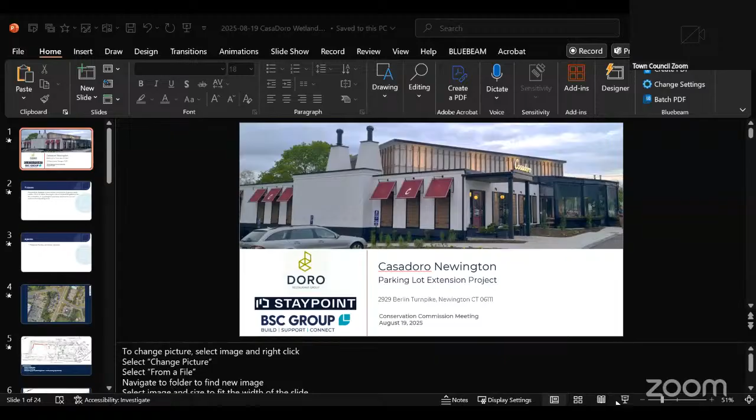I believe there were some modifications to the application, and we do have some comments from the town engineer regarding the current site proposal. I would like to read those comments that we received from the town engineer into the record. I don't know if all the commissioners have had a chance to read this, so I want to read it into the application so that we have a good record. This is an application summary from town engineer Chris Zibido.

It says, please note the applicant has submitted revised plans on Wednesday, 8/13/25. So this memo is based on a quick review of these new plans and previously submitted plans. Most notable is the removal of the pedestrian stairs in the adjacent commercial plaza. Applicant is seeking to construct an expansion of an existing parking area for the Casadoro Restaurant, the former Bertucci's Restaurant on the west side of the Berlin Turnpike.

To achieve the maximum number of parking spaces for the site, this application includes a substantial retaining wall along the west and southern sides of the property. This proposal also includes a novel stormwater treatment and detention system utilizing the landscape islands as a bioswale, then containing the higher level runoff in a subsurface drainage detention pond before excess runoff exits the system on the south.

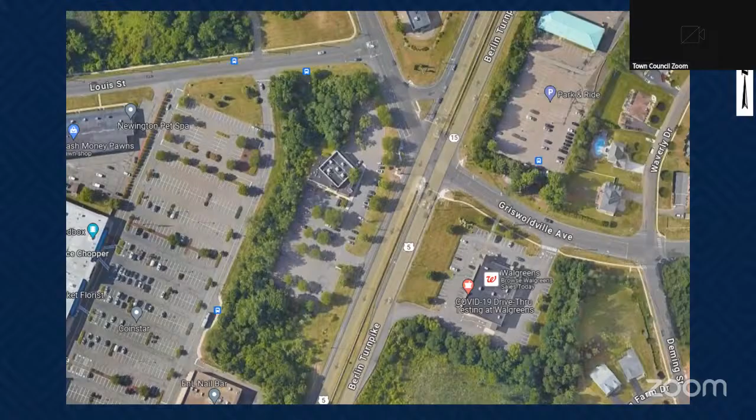That's essentially all I'm going to be doing this evening. I'll try to keep this as straightforward as possible. We're referring to 2929 Berlin Turnpike, the former Bertucci's property, and this is the survey associated with that.

I'll note, for the record, that during this interim phase, a silt fence and erosion berm have been installed, essentially to prevent any additional disturbance during this time, as we've been negotiating with both the Wetland Commission and the Planning and Zoning Commission.

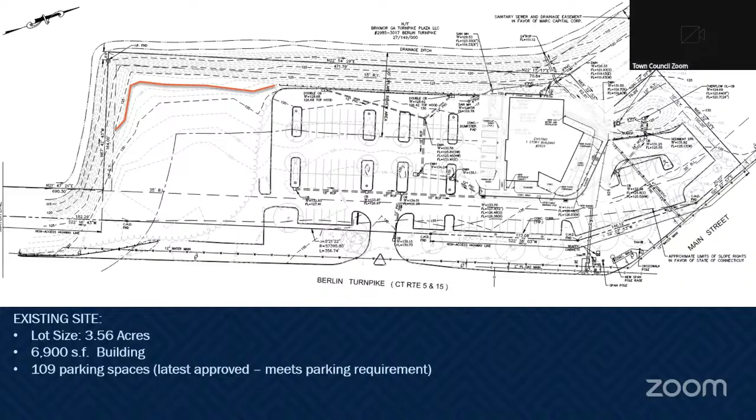There's an update to our erosion sedimentation control plan. The main point I'd like to identify is there's a substantial amount of additional shading on the plan. This shading represents any slopes in excess of 15%, which is a requirement for the Newington regulations. We've added that to all the plans in the development. Any disturbance within that area, obviously, we'll coordinate with town staff.

There's a question as to whether this would need to trigger a public hearing for a potential special permit, but I've presented this to Planning and Zoning. I presented this particular issue regarding the 15% slopes at the previous meeting, and at this point we are still in the process of site plan approval.

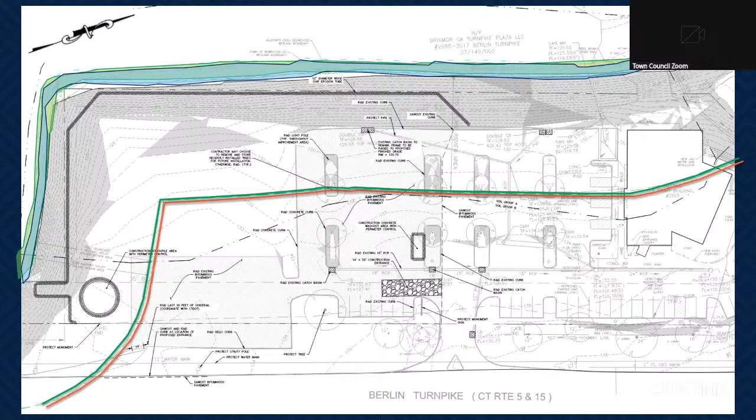We've added, again just for clarification purposes, the green identified in the background is the delineated wetland on site. The blue in front of that is the town GIS identified wetland. The green and red lines represent the infield delineated and town upland review boundary areas.

As far as erosion sedimentation control, we've added a note on the plan - this green area is our construction washout, the concrete washout area.

As far as perimeter controls, I understand Mr. Zebedeo's concern with regard to erosion controls, especially in relation to the wall. One of the main reasons we're proposing the use of the 12-inch wood chip berm is its substantial increased stability and substantial increase in filtration and benefit with regard to protecting downstream areas. It's got substantially more mass and filtration possibility, which is why we're proposing this use, as opposed to simply just an erosion and silt fence. The turbidity curtain obviously is something we can definitely include in the stream area.

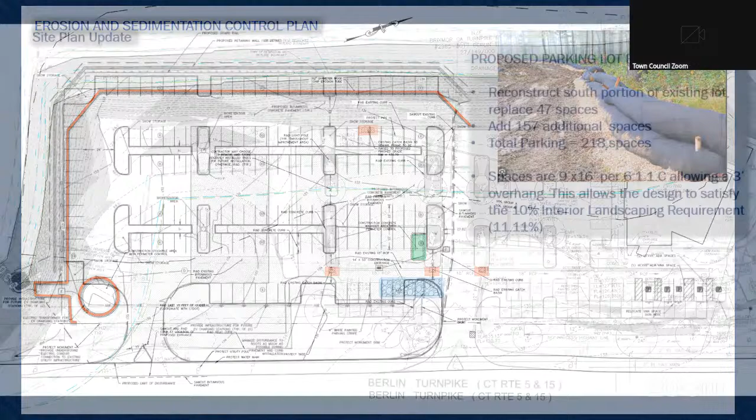As far as the site plan update, there are a few minor changes. If I could correct the record, the site plan narrative had not been submitted, had not been updated. The correct number of parking spaces currently being proposed is 218. We are replacing 47 existing spaces, and we are adding in total 157 additional spaces as identified here.

There was a minor change based on the layout associated with nonconformities regarding the permanent monument sign that is currently nonconforming on the property. We had to adjust the curb lines so we did not modify the sign. As a result, we removed the landscape island in the center here. This switched to 18-foot spaces in place of the 16-foot, and everything shifted up as a result. There may also be some additional concerns regarding additional pavement encroaching in this area. I have to examine that, and that will be part of the planning and zoning submission when it's submitted.

Another change was I had designed my initial handicap parking associated with the International Building Code. I did not recall at the time that the state of Connecticut has a more stringent requirement for that, so we went from the 7 initially proposed up to 9 proposed to satisfy the state of Connecticut Building Code.

Is that vertical bar going across there? Is that a baffle for floating debris? This baffle right here. Yes. So basically what happens is this drops directly down into this opening, and then this grate sits directly on top of that. If I go back up to this, you could see. I'm saying, is the idea to hold floatables behind that?

Yeah, so the floatables like refuse, bottles and so on basically collect on the top here. And then anything finer will drop into the structure itself and is contained inside there, so any wrappers or contaminants or those types of things are basically right there at the surface. Thinking about the amount of litter we have lately around, that's going to require some pretty regular maintenance. Yep.

They've designed it, and as small as it is, actually it is quite wide in diameter, and they have designed all of their products, and that's why I specifically like working with this company. They've designed all their products to account for those types of things. They recognize that a landscape crew is most likely only going to come through here once or twice a year. So they've designed their systems so that as something gets clogged, it basically lifts up a bit more, and it's intended to hold a certain amount of sediment and contaminants through a longer period of

time. If it were to be fully clogged, the reason why there's a small step in the structure is it just overtops. Now, you can remove the structure entirely and it still functions effectively because it drains directly into the actual treatment system. So this is providing your pre-treatment. If it were to fully fail, for example, it just bypasses directly into the bioretention swale and that becomes your pre-treatment. So it's a number of lines of defense.

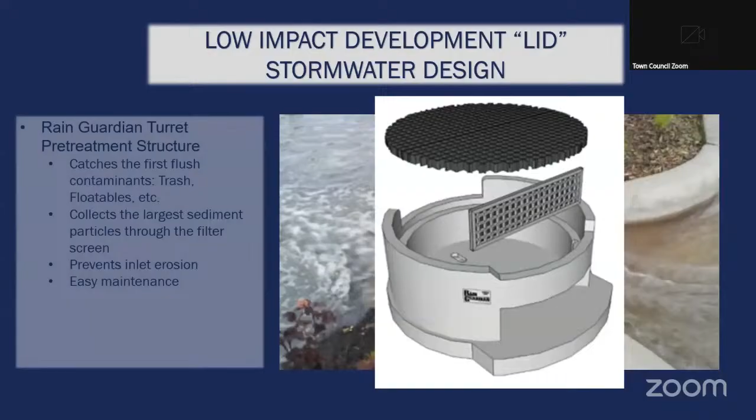And then this is what the actual swale looks like. Your pre-treatment structure will be up here. It discharges into the system itself. So you have 3 inches of mulch, standard mulch. There's nothing complicated about it. It gets replaced every year, and that actually provides up to 90% of the sediment loading removal, because as it filters through the mulch, all of the larger particles of sediment are collected. And then when the landscape crew comes through to do their mulch every year, they take out the mulch, they put in new, and you've just removed all of your contaminants.

Any contaminants that make their way through the mulch go into what's called high flow media. It is a proprietary media. It runs at about 100 inches per hour, but it's got a very small amount of organics in it. And the organics essentially chew on all of the contaminants that come off of the vehicles. It's basically a self-healing system. They use the nutrients provided from the contaminants and it continues to recycle itself. So for maintenance on the high flow media, they have case studies showing that it continues to provide greater than 80% TSS removal for 10 years or longer.

And then also all of the landscaping that is proposed is specifically designed to uptake any phosphorus, nitrogen, any of the typical types of contaminants that come off of vehicles. It filters down through the media into the bridging stone and then into this, it's essentially a milk crate structure, which is the detention. In this case, the detention will store and provide the peak flow attenuation so that we're not increasing the amount of flow off the site. So it all works as kind of a symbiotic system. And the benefit of this is you've eliminated all of your catch basins and pipes. So essentially everything sheet flows to this system and then is treated.

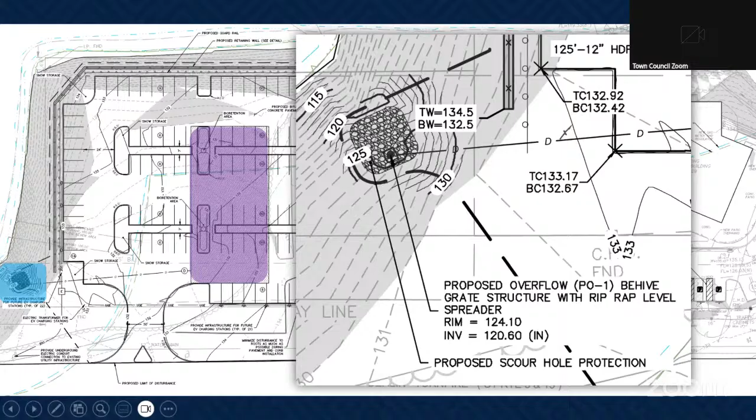Those are the changes that were made. I know that there were a number of comments that were brought up in the meeting. I don't remember all of them directly, but I can do my best to provide some backup or response to those. So in the engineer's report, he mentions that the employee walkway staircase has been removed. You want to speak about that a little bit? What was the reason for removing that?

So one of the reasons why we are requesting the higher number of spaces that we are, I did some analysis to determine that right now they are renting, I believe it's 50 spaces from the Price Chopper Plaza. They only have a 1-year lease on it, maybe even by month. So they could choose at any time to say, we're not going to renew your lease. So we calculated at most, at peak season with the restaurant running on a Saturday night with full reservations, they see upwards of 50 employees. So I verified that we can essentially place 50 employees.

If we were to imagine that each employee drives him or herself individually, there are still a greater number of spaces with 50 spaces accommodated for employees, in addition to those for the users of the restaurant. So as a result of that, and the fact that we were on an adjacent property and they could at any time choose to revoke the lease, the decision was made by the development team that the staircase was just not a viable pathway to move forward. Thank you.

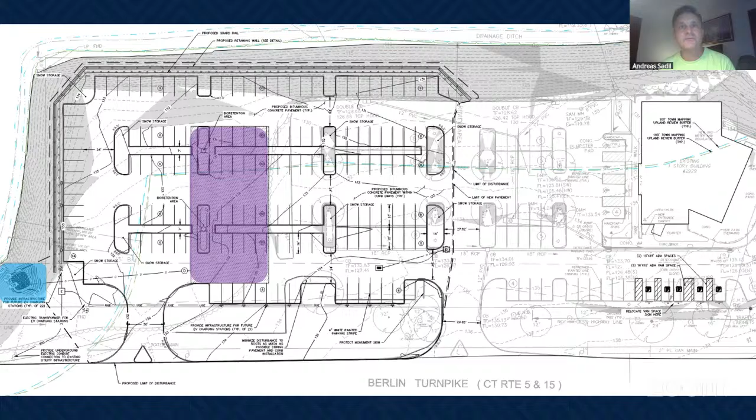And I'll respond. I'll say I agree completely with the first point. I don't think the pencil's down yet. I know that the applicant just heard this evening the engineer's concerns, so I'm expecting that there may be some modifications to the plan based on those comments to address those concerns. Can you go through the remainder of the concerns? Because you had mentioned there were a number of bullets. I just wanted to clarify. Okay, so from the town engineer. Right, so we still need to get to the commission to talk about these, but these are generated by the town engineer, so I'll just go through them. There may be additional concerns that the commission raises.

So number one was the addition of permeable surfaces to reduce the MS4 stormwater impact. Number two was reduce to 199 spaces to pull back from the water course and preserve the tree cover in the upland review area. Third was impact of retaining wall construction, in that it requires all upland review buffer trees to be removed, requires substantial soil disturbance on the hillside, no room for erosion and sediment controls, high risk of stormwater, high risk if a major storm develops during the construction phase, the need for geotechnical test borings and evaluations to ensure that the wall can be supported, and impact to the abutting property tree root system. So those were the concerns that I took from the engineer's memo.

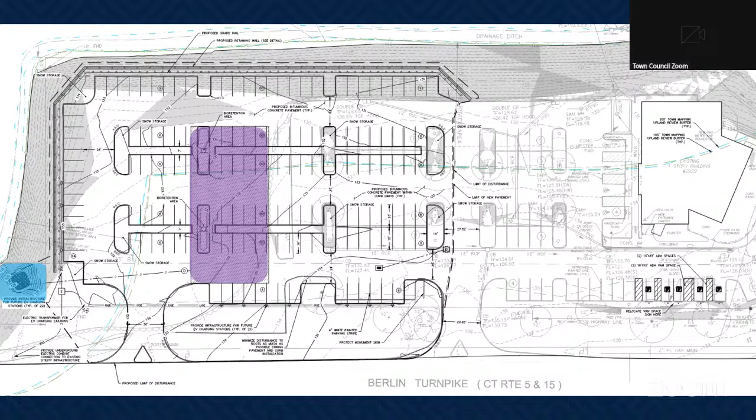For example, I'll provide you some background. There is one wall system I'm aware of. It's a mechanically stabilized wall where instead of using wall blocks, it's actually built in layers of essentially earth. They're sections of screen almost that are installed in a step, and as you install it, you install a reinforced layer of earth and it keeps going up from there. It's an option as a proposed wall system that would be less intrusive than a standard modular block wall.

But again, I have a hard time committing the developer to, well, this is what we have to go for. You know what I'm saying? I don't know if Mr. Zebedeo would be on board with a conditional, as long as we get an engineered design stamped by a structural engineer that says this wall system will satisfy the requirements of a structurally stable and safe design from a parking lot standpoint, while also taking into consideration the impacts associated with this wall adjacent to the property line and the wetland system. I don't know if the commission would be interested in something like that.

So just to throw in my 2 cents on this, I would have to personally support a condition like that, if for no other reason, when I was in his shoes, it was nearly impossible to get a fully engineered wall design prior to land use commission applications. So I've been where he is. I know where he's coming from. And I also understand it's an imposition on the property owner to say, I've got to have that engineered stamped plan for the retaining wall, because typically the site engineers don't design the retaining walls.

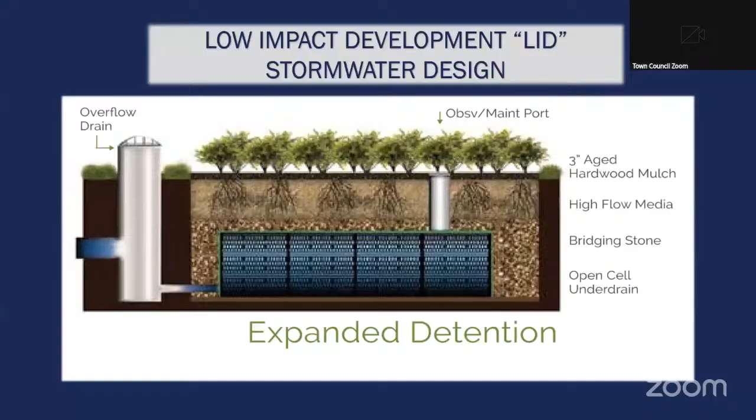There's always the chance, but I try to ensure that my erosion control plans—what you don't see on the E&S plan I just provided, but is provided in the document—is all of the note information that also goes with this, laying out all the steps you have to take.

Here's a construction sequence you have to follow. Here's all the detailed information on how to install all of these controls. This is the correct way to install a turbidity berm. If you're on a slope of a certain steepness, there's a certain number of stakes you have to place into your wood chip tube, and so on.

So there's a bunch of additional information provided to the contractor to ensure that everything is followed in accordance with the Connecticut manual.

And I just want to follow up on the inventory—are you open to a third-party reviewer coming in and doing the inventory and providing us with an environmental impact assessment? I'm not sure we can get one in a month, that's my only worry.

I can provide one probably within a month, but it would have to be from BSC, because we have the capabilities—we have biologists on staff, soil scientists, wetland scientists on staff—that's the only way I could probably get the time frame to work. If there's a concern, all of my ecologists and biologists come from my Worcester office.

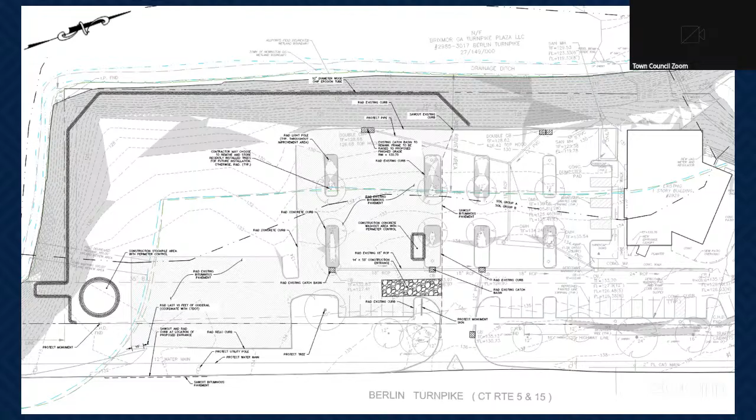That's what I'm thinking—that's gonna be quite an undertaking. Yes, we recognize that. I'll throw this out there since Chris raised the issue of reducing parking spaces. The entire west side has 27 or 28 spots right now. If you eliminated those, would that reduce the wall considerably? You'd still have an aisle to drive through if you reduced those parking spaces, pulled them back 10 feet.

There is a potential to make a significant benefit there, but it all comes down to the cost ratio—can we handle a reduction in spaces, essentially, without having to readjust the entire lot? I recognize that.

It'd be more like 28 spaces. So you'd still have 122 for customers, using the 50 number for the workers. If you went that route, you could probably still get some parallel parking in. That would probably reduce some of the tree cutting potentially.

It's definitely something we can at least have the conversation about.

Commissioner Wilmette: So I'm looking at this wall here—you're gonna bring cars right up to the wall, and there's 28 cars? Yes. And how long is the wall approximately? Probably in the neighborhood of 175 to 180 feet, something along those lines. So for 28 cars, you're gonna build a wall 18 feet tall, 200 feet long?

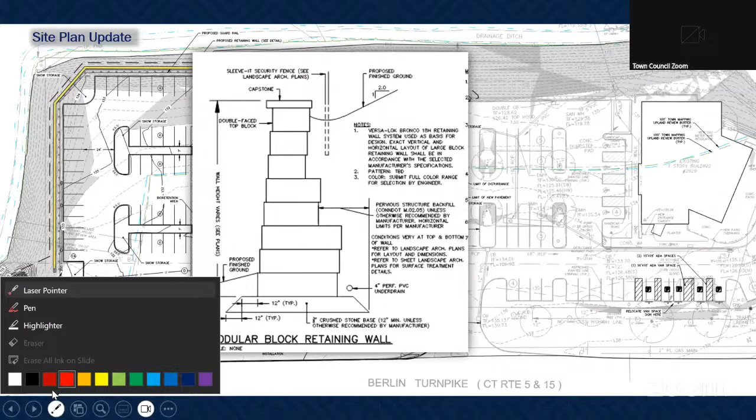As far as the design, I can't speak to the actual design, but in order for them to tie everything in place, let me go back to my wall design quickly. Because this is a generic detail, depending on size - to provide clarification, yes Commissioner Zellick, there will be a geotech report required at some point for the wall engineer to provide adequate design of whatever the background material is behind the wall.

The reason why I don't design them and leave it up to the wall manufacturer is they do this every day, and you'd hope they're going to provide the correct design given all the specific parameters - in this case trees, 5-foot separation, 18-foot tall, plus the overburden of parking, plus the guardrail. They take all of those into consideration in their design. They've seen it all before and say, this is what works and this is the design we have to follow.

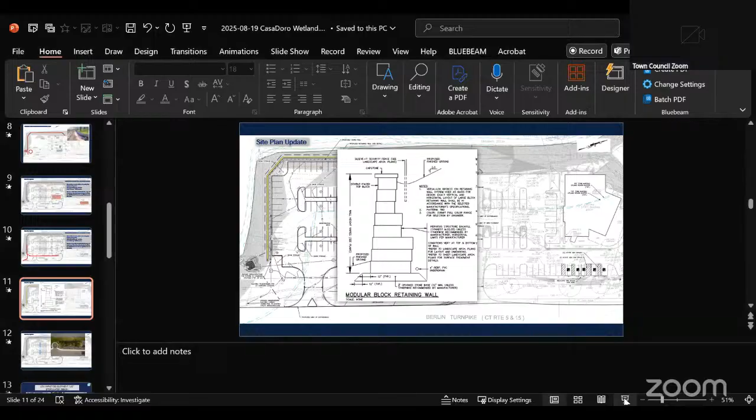So with all that said, I think the commission would prefer we have a complete application that has all the information it needs and addresses all the concerns raised prior to us going to a vote. So one of those concerns was the geotech borings - would that be something completed before we wrap up this application? Because I don't want to have some open item existing and have a commission vote on something that was brought to their attention and was neglected.

I would think it's unlikely that they'd get their geotech report prior to our next monthly meeting. And if I may, I don't want to speak above myself, but the information the geotech report would provide would give information to the wall engineer, but not necessarily any information to the wetland commission. Just playing devil's advocate - what if the geotech comes back and says this is a no-go, you can't build this, and then you come back to us again for a revision, or you need a 20-foot deep foundation or something?

Well, the benefit is a lot of the technology they have now for these wall systems is eliminating a lot of the 'you can't do this anymore.' So if we can't do a small modular block system, we have gravity block, which is large, weighing 2 tons, that basically locks itself into place and holds itself up. They also have the grass wall type of system that I mentioned. I've been in this career for 17 years, and over the last 5 years the amount of additional technologies for wall stabilization and erosion controls are exponentially larger than they ever had been.

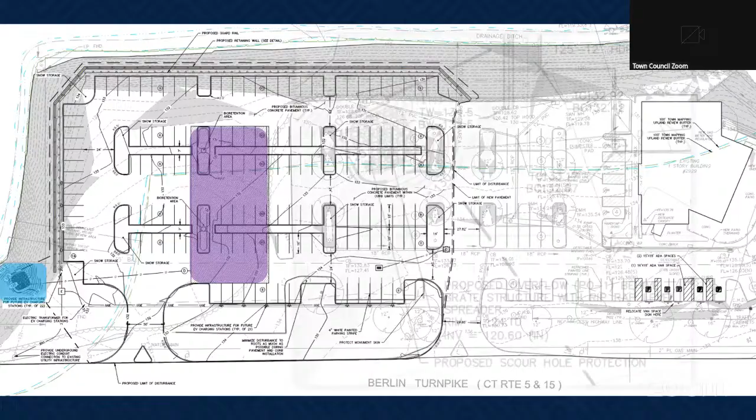Since they've built the lot, this has become completely full. This part of the lot fills up first because they're not going to park in the aisles. But once this is full, they start filling up all of the fire aisles again. And the third time I visited the restaurant, I ended up parking in the Price Chopper because there was no physical space for my vehicle to fit on the property anywhere.

Now we're in the middle of the summer season. People are on vacation. We have not had as many of the parking issues. I mentioned this at the planning and zoning meeting. A very interesting thing to see was Mother's Day. They had the highest attendance in the restaurant to date, and they did not have a parking issue because everybody came as a family. All of the vehicles arrived together with a full family.

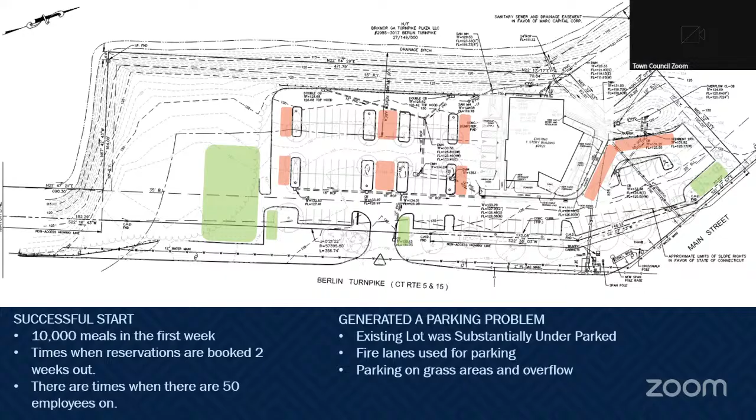Can you go back to the picture of those big socks? Yes. So, a question I have on your plan, those are going to be put right at the edge of the wetland, right? Those big socks. Nope, those are placed on the edge of the property line. And then in this case, they're placed about 5 feet separated from the edge of the wall. Now, there's only 5 feet from the wall to the property line. So it's gonna be inside that realm of where the wall construction would take place.

My good question is, why don't you put it a layer higher? Is water going to pool? Heaven forbid, there's a storm. Is water going to pool in that area?

Why don't we put some more erosion control higher up on the slope while you're building that wall to cut down on the velocity of the water, maybe come down slope? Again, I'm speaking to the steepness of the slope. Is it going to be too late or not enough when you're right at the edge and the water's coming down? You follow? You're gonna have a waterfall there and your water's gonna pool there. Is that what we want?

A lot of the times when we determine what the phasing plan would be for the wall construction, that's where you would get into it, and there's a number of additional measures: you can use diversion swales, you can use sediment traps and so on. So as a quick example, let's say they're going to install this section of wall. They would excavate back portions of this area, but we know that if it rains, the slope is going to push rain in this direction.

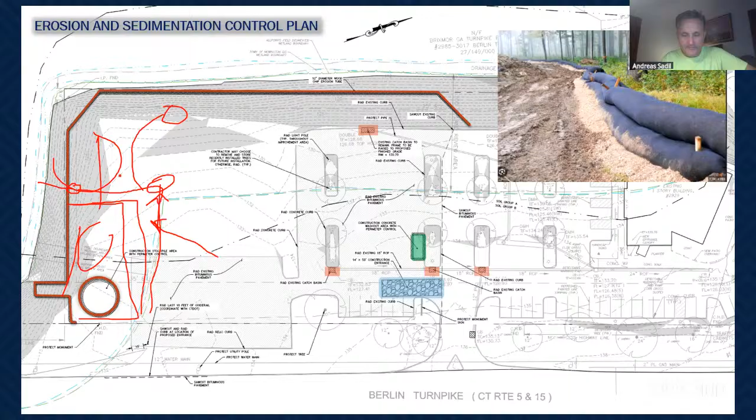Okay, next question. We talked about permeable pavement. Can you tell us more about installing permeable pavement? Where in the plan is that going to be, and can you give me an explanation of what that's all about? We have not proposed any permeable pavement at this time. Given that we were proposing the focal point design and the low impact development stormwater design, we believed that satisfied the low impact development requirement.

I don't believe the town actually has a low impact development requirement other than the MS4. We used to; it was repealed. There's discussion with the Planning and Zoning Commission to reinstate some form of it. They want to get past the part that made it objectionable, which I wasn't here for, so I'm not that clear on. But things like your drainage design would be ideal.

My suggestion about the permeable has more to do with my impervious coverage reports to the DEP every year. So it's a selfish interest on my part, but it's also part of the general permit for the MS4. So I might be looking at it from my perspective, but they look at it from their perspective.

We haven't been keeping strong numbers on how much we've reduced in a given year and how many of our developments have increased it, but it is still part of the calculus for the MS4, which is about to be reissued again next year, I believe.

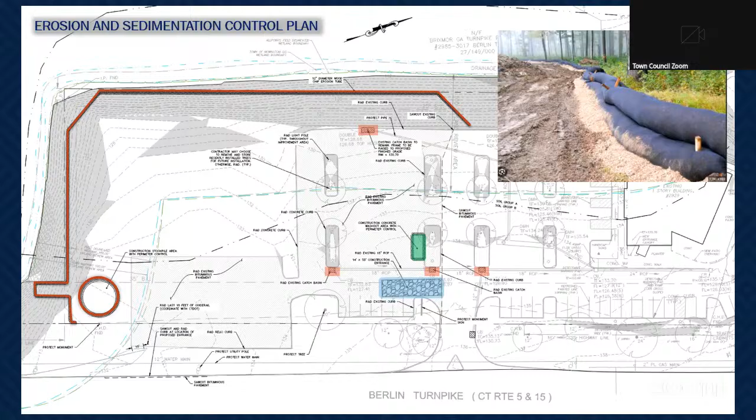So for the benefit of the commission, where might those permeable type of surfaces be placed? My thoughts, because it would have been easiest for Frank to incorporate, would be the areas around bioswales. Only because when you have these kinds of pavements, you often have a high level overflow. And so that overflow could be directed into the bioswale without having to have additional plumbing or something like that that would direct it towards the storm drain system. And how many bioswales do we have here? Is it 6? 2.

So to respond to that comment, one of the benefits of these systems, and there's case studies that show this, I'm not just saying this, because all of the previous designs, including pervious pavements, involve a rather stringent maintenance requirement. I have designed a few pervious asphalt pavement areas. I did it for UConn. I observed a design at UConn, one of the first in the state of a concrete pervious pavement. The situation that arises with the pervious pavement, not like a grass pave situation, which I can speak about momentarily.

The asphalt pervious pavement situation is, because we're in New England, everything gets salted. And there's a number of towns, I might be out of date with this, that still don't use the salt. They still have a mixture of sediment and so on. And there are also situations where during plowing and all of that, there's a substantial increase in sediments generated just through the wear of the roadways. Well, all of that sediment gets into the pervious pavement.

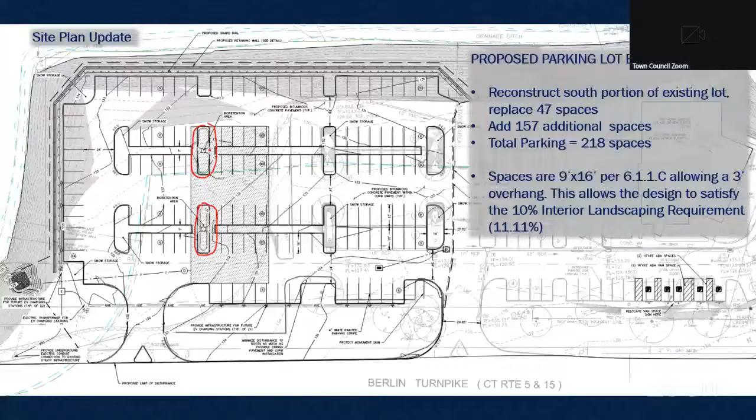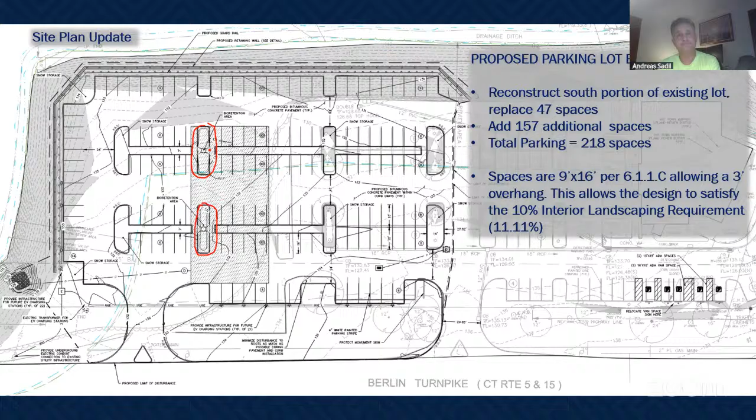Thank you. Okay. To my right, any questions, concerns, comments? No question. Okay. To the left. Anybody? No. All right. Commissioner Sadil, one last chance before we table this. I'm fine. Thank you. Okay. Chris, any comments before we table? Mr. Chairman, I just

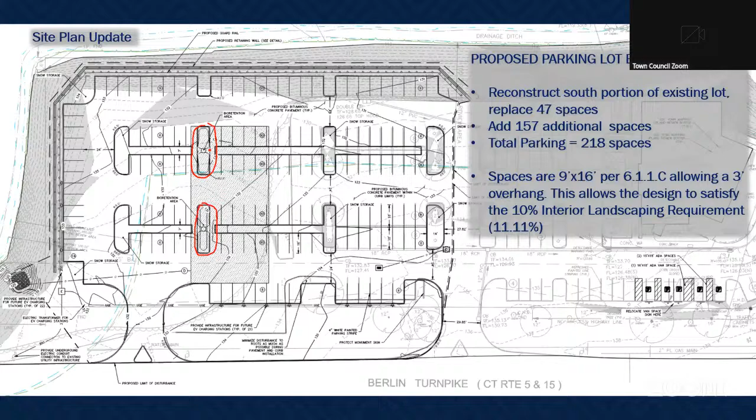would reiterate one of the earlier questions I asked, that primary separator. You said if that does get filled with floating debris, say it wasn't maintained, it would outflow into the open swale anyway. That is correct. It wouldn't go into your underground vessel. Nope. So eventually people would see it. That's correct. People would see it. And I understand how Dorian runs his restaurant. I would imagine he's not going to allow a bunch of refuse to sit in any of his. Just wanted to make sure.

But yeah. And then to clarify, as far as the high flow, there is just a standard beehive grate on the high flow. So again, it prevents any of the floatables or anything from getting into the detention system. That's it. Okay, then I guess we'll table this. If I may, you table for, because you need what information? I just want to clarify and know what I need to provide.

Okay, so we're looking for the environmental impact study. Looking for your soil scientist or biologist to evaluate the URA, the feasibility of reducing the footprint somewhat. And I can see in your presentation we don't have to spend a lot of time on the permeable versus impermeable pavement. But if you can think of something in the next few weeks, it might work for that. Okay. And again, that's just for the MS4 reporting, so that's where I'm at with that.

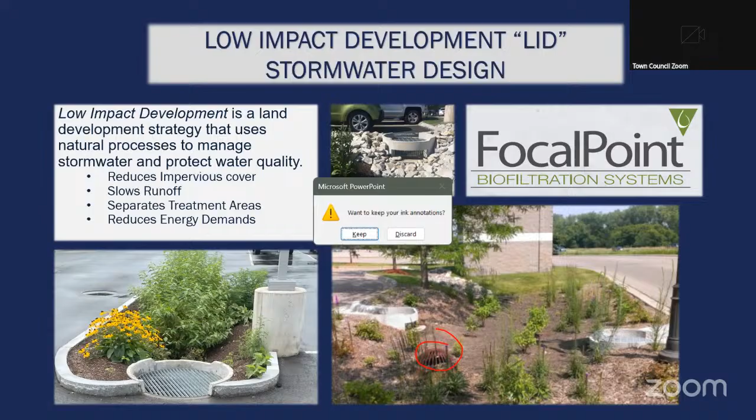All in favor, say aye. Aye. Any opposed? Any abstentions? Okay, well, thank you. We'll table this until the September meeting. Thank you for your patience and time.

All right, moving along, item number 8 on the agenda, public participation on non-agenda items. Anybody in the room wishing to speak? We're not seeing anybody online that's joined, Chris?

Give me a moment, get caught up with the PowerPoint. There are no attendees online. So no one online? Thank you. Okay, all right, well, we did have an attendee earlier, he's bailed out.

The remaining are panelists. Well, move on to communications and reports. Agent communications, Conservation Commission Regulation Amendments, 2025. So you put together something for us, Chris?

I took a stab at, let's see, I'm almost caught up here. Come on, come on. So, while you're looking, I took a stab at least at the signage. I haven't heard a lot of commentary from the commission about what else they might like to adjust.

We're still waiting for a copy of the model regulations to be sent to us. So when you say model regulations, are you asking me to rewrite the regulations for your approval? No. State of Connecticut sends us, or all the commissions, their suggested model regulations. The way we've done this in the past is there's